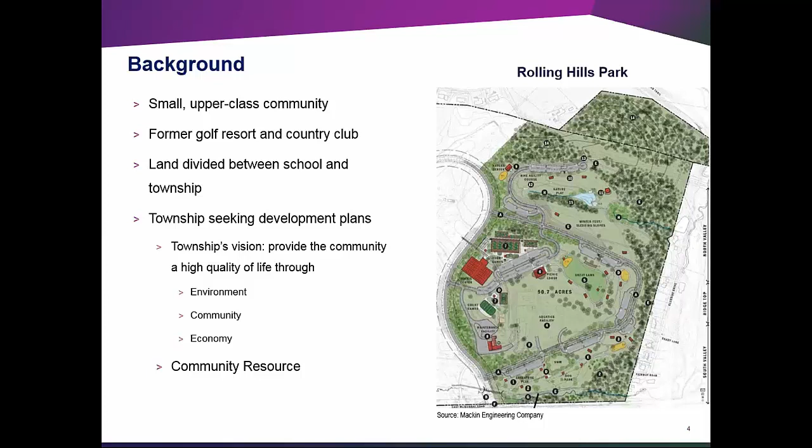A plan has been drafted, but an official park design has yet to be adopted. The township hopes to improve the community's quality of life through the 3 pillars of sustainability, and parks and recreation play a critical role in habitat and ecosystem preservation, engaging the community, connecting people, attracting businesses, and increasing neighboring land values. Our design and goals align with the township's goals for community improvement and engagement, but we achieve these goals through the emphasis of sustainable development.

Our project proposal will focus on the North Valley section of the park, only a portion of the overall park design. Using the illustration provided by the engineering firm working with the township, we have mapped our project design, and our main focus is a 6,000 square foot net zero nature center.

While the firm's plans include a nature center, there are currently no real published plans for a sustainable design. The nature center will feature a green roof and attached greenhouse in our proposal. Also included is a 500 kilowatt solar array, which will provide enough power for the nature center as well as park features included in the township's current working design.

The nature center will also employ a geothermal heating and cooling system, and a biodigester is also proposed to heat the greenhouse, produce fertilizer, repurpose food waste, and act as an education tool. Last, we have included information about planting native meadows to enhance the park's triple bottom line.

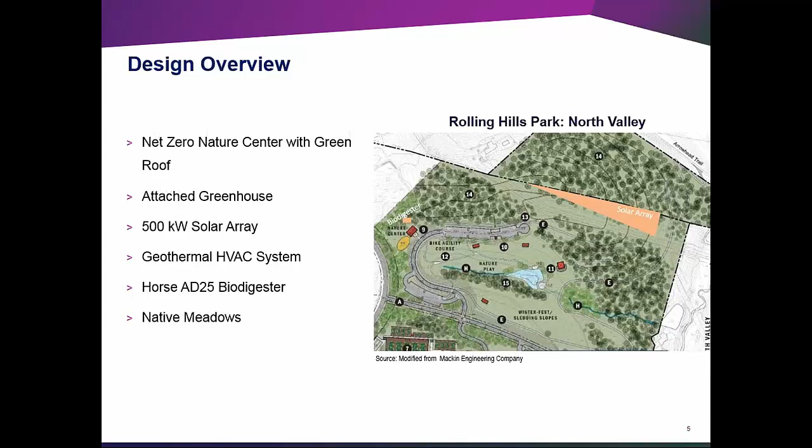We really want Peters Township to take credit from implementing accepted environmentally friendly technologies that would help mitigate air and water pollution in the region. Through the tactics we mentioned, the 3 primary tactics being renewable energy, energy efficiency, and education, is really where we want Peters Township to focus on to take the township to the next level.

The school district is important in our case just because it's on the neighboring piece of land. Unfortunately, the school itself was fast-tracked in terms of design and build, and there were very few sustainability features implemented. So there's a chance now to really engage the school primarily on having input on what the curriculum could be at the Nature Center for the educational side. Plus, as Kevin will mention later, a virtual net metering scenario is also possible with the high school.

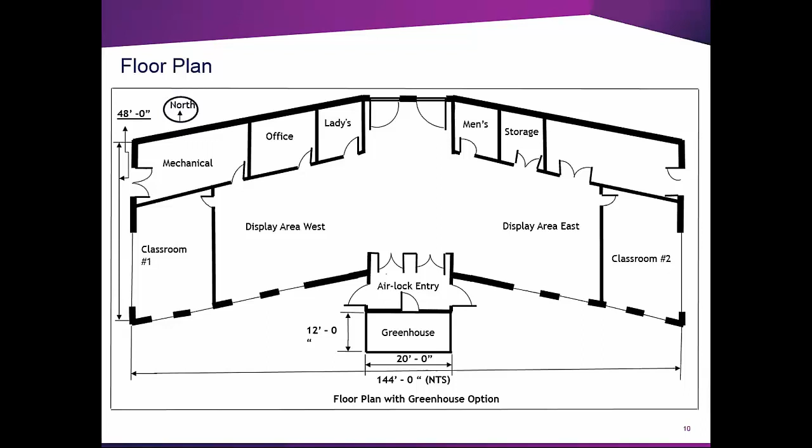The building features, if we go to the next slide, a central tower that will provide an opportunity to produce a chimney effect to cool the building during the summertime with natural convective currents that will rise and flow out through the central portion of the roof structure. And we designed the building with an ample roof overhang that will provide summer shading and lower the heat demand when it comes to cooling requirements.

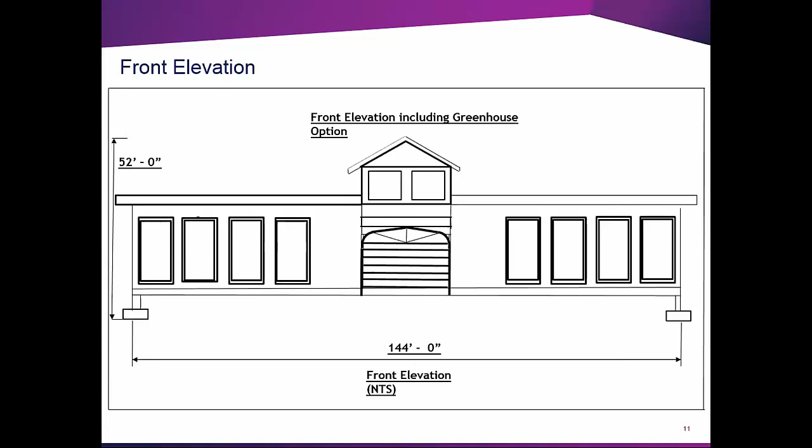The glazing itself that we specified would be low emissivity glass with a half inch airspace, double pane, and argon filled, so they would be pretty stout thermal performers when it comes to efficiency. And the roof design, as was mentioned earlier, we plan to put a green roof on the flat surfaces on either side of the central tower. We'll go to the next slide and talk about the green roof features.

Our plan includes a lightweight, extensive green roof. The green roof will total approximately 7,000 square feet and consist of a series of layers, each serving a specific purpose for the roof's lifespan and efficiency. The roof design will cater to the site's features, taking into account the structure's exposure, weather conditions, leaf cover, roof slope, and available substrate.

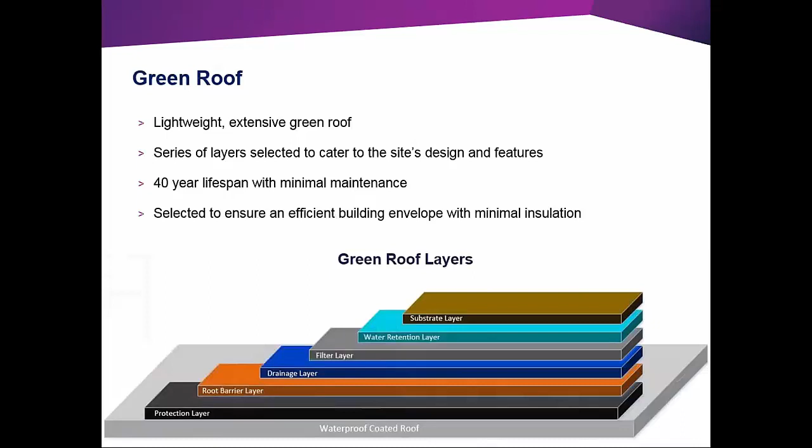The roof's life cycle is more than twice that of a conventional black roof and requires less maintenance. A green roof was important to this project for education and the efficiency it provides the building envelope. A green roof's thermal resistance and passive cooling effect will lower the stress on the HVAC system. Studies actually showed that structures with no to moderate insulation see better energy reduction results when fitted with a green roof. It is for this reason that only a moderate amount of insulation was necessary in the structural design.

So why choose a green roof? Green roofs provide a multitude of benefits. Most center on its contributions to the environment, energy conservation, and costs. This particular roof will serve as an educational tool for the community, giving it social value as well. Residents can learn more about the functionality and benefits of a green roof, with the hope that they will consider building their own or at least using the same principles of stormwater retention and providing natural habitat.

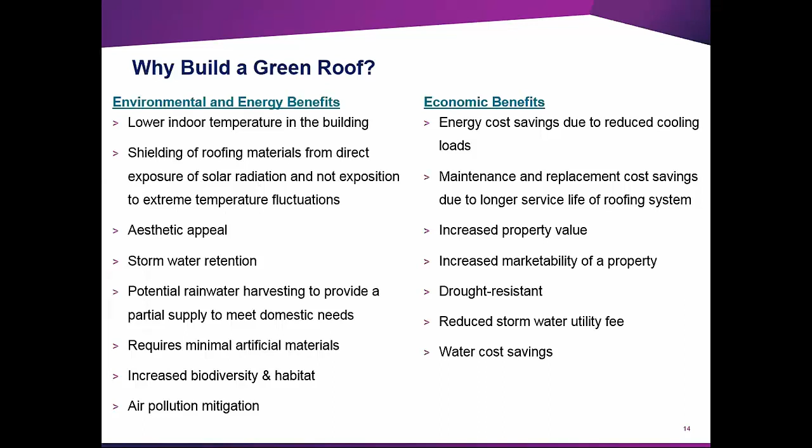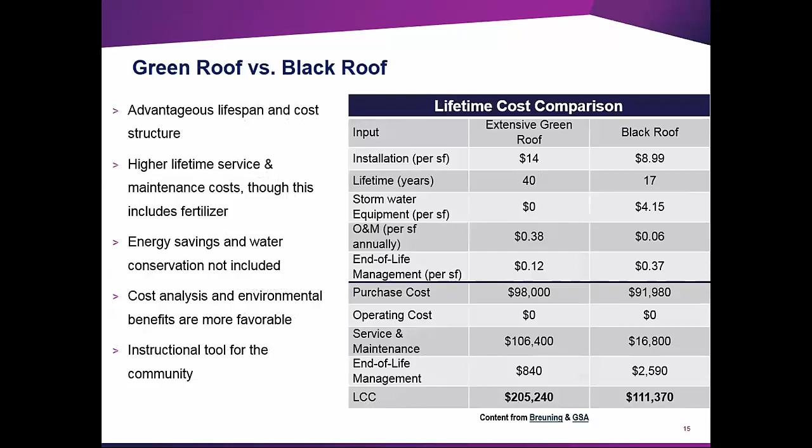Now we're going to move back to Wojtek for geothermal. Okay, guys, so we decided to go with a geothermal system, a water-to-water heat pump, and we are proposing a closed loop system.

A couple important things to mention here, the benefits. We are proposing a zoned space. So we have established 4 zones in this case, and that gives us the ability really to maintain the kind of comfort temperature that we want in each zone, and that's going to be really important for a building that's going to have maybe a lot less usage in the nighttime, potentially a lot more usage on the weekends.

A couple things I wanted to mention before I go into the benefits, just some of the assumptions here. The nature center doesn't have to be super cold in the summer. It's going to be well constructed, and with some of the things Ed mentioned, we're going to incorporate the overhangs, the passive features to really limit the amount of radiant load we have on sunny summer days. So those are just some of the initial assumptions I wanted to mention.

To continue with the benefits of the system, maintenance is a really big one here, because when you have 4 separate units that are maintaining the comfort in the building, individual units can be taken down without shutting the entire system down. Probably the biggest benefit that we saw early on in the initial design is, almost everywhere I looked, geothermal systems were promoted to show about 40 to 50% in energy reduction. That really caught my eye, and that's why we decided to go with this ultimately in a detailed design.

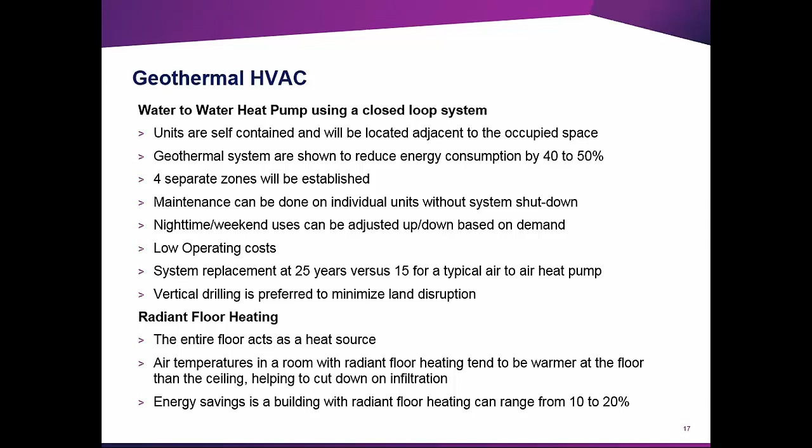We can maintain lower temperatures in the building, plus radiant floor heating really helps with cutting down on air infiltration, because a lot of the warmer air is staying towards the bottom, and the floor itself has the potential to save energy up to 20%. Okay, we can go on to the next slide. And I'm not going to spend too much time on the next slide.

So this is our proposed layout. We are proposing the 4 units. As I mentioned, we want to have four units, 4 zones. And this just simply shows you how the radiant floor plan is set up. You have the hot water going in to help heat the floor, and then you have the cold water return back to the units to go back out again to heat the floor. So we can keep going.

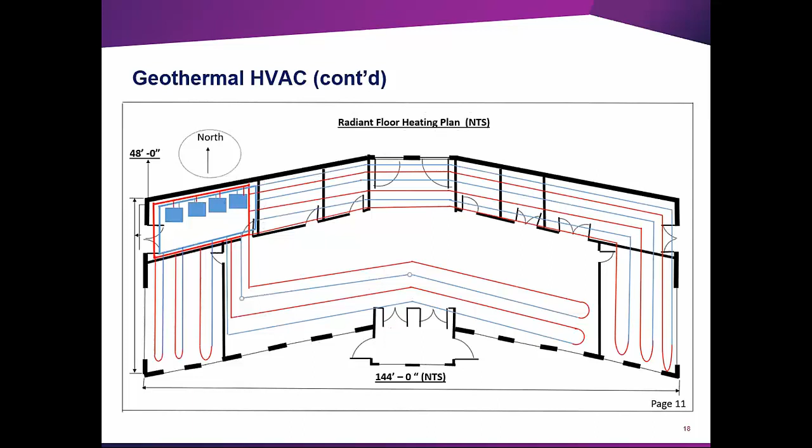For the cooling portion of the Nature Center, we are proposing a variable air volume system with an economizer package. The benefit of a variable air volume system is it's a decentralized system, and the main way it varies from other systems is it maintains a constant temperature, but it varies the air volume. And so the second point here, we can see there's quite a few advantages to this type of system.

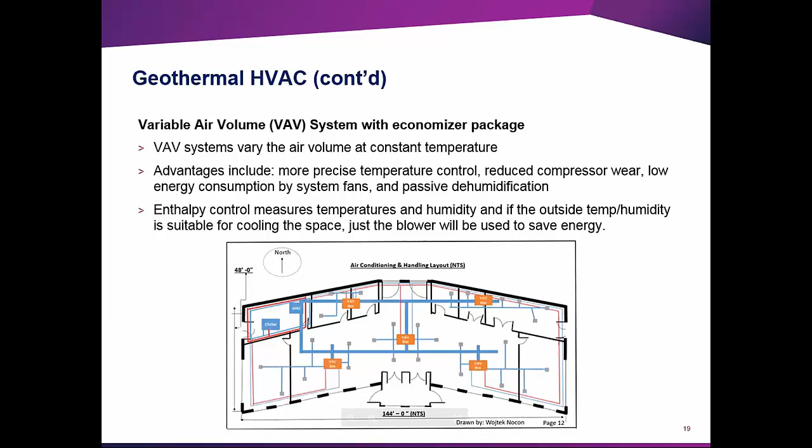More precise temperature control, which is what we're looking for definitely. Reduced compressor wear. System fans tend to be one of the biggest energy consumers of HVAC systems, so we have lower energy consumption by the system fans, and then we allow for passive dehumidification. The system also is really positive in the sense that we're going to have enthalpy control, and the system will measure the temperature and the humidity outside, and if it's suitable for cooling the space, the system will use just the blower, and that will help save energy. Okay, we can go on to the next slide, please.

Thanks, Wojtek. Moving on to the solar array. Anytime you want to achieve a zero carbon output, on-site renewable supply is always important. So we decided to go with a solar PV ground-mounted system with a total size of 500 kilowatts with a potential scale-up option. This will be located in the northeast side of the park along the gas line. And just please note that some trees will have to be removed in order to install the system. Next slide, please.

So the estimated output or the size of the system was really based off the annual park load estimate. Ed calculated the annual park load estimate based on the peak load of each facility. The annual load estimate came out to be roughly 560,000 kilowatt hours annually. And the annual estimated solar output of the 500 kilowatt system is roughly 613,000 kilowatt hours annually. So this would be enough to cover the entire park's load, and the majority of the output would come in the spring and summer months. Next slide, please.

Moving on to the financing and available tax credits. The township can enter into a tax equity financing option. This is where a third party can pay for the upfront capital costs, so the township wouldn't have to pay this steep upfront capital cost for the system.

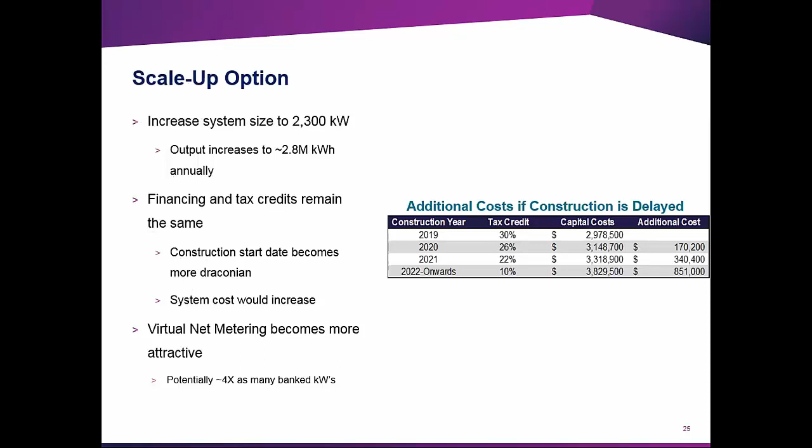However, the virtual net metering becomes more attractive as the township will be able to bank a lot more kilowatts, and the high school will be able to use the excess banked kilowatts throughout the year. So the virtual net metering is a lot more attractive under the scale-up option. Moving on to the next slide.

I wanted to point out, we also looked at a solar carport for an alternative design method. Same 500 kilowatt system. This we located in the adjacent parking lot next to the nature center. Some of the additional benefits that a carport structure has rather than a ground mounted system is it creates vehicle shading for community members and potential for a car charging station.

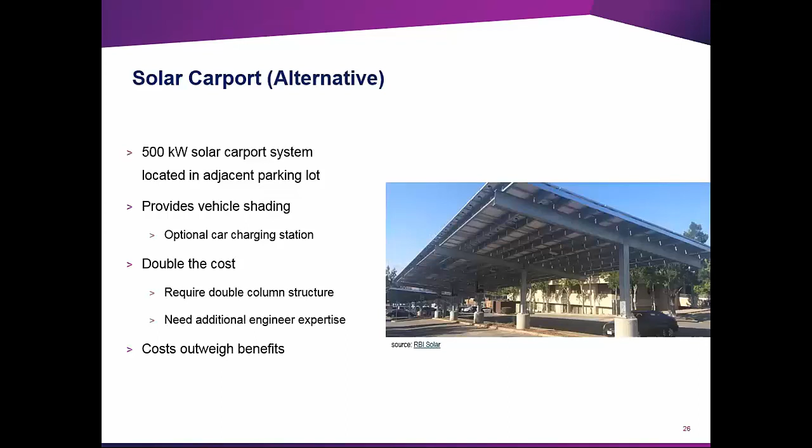However, getting into granular details, it was roughly double the cost of a ground mounted system. And simply the double cost really just outweighed the benefits of the shading. So we decided the ground mounted system was more viable. And now moving on to the biodigester and greenhouse.

Thanks, Kevin. I will be talking about the energy option we used in this project. Food waste is an important problem in the world. Estimates are as high as 50% and it poses a great danger for food security and GHG emissions in the future. We want to include a bioenergy technology option in our project to show how energy can be produced by using our food waste and educate park visitors.

We picked a small biodigester to generate electricity and heat. When we look at the feedstock potential around the park, the most feasible one seems to be Peters Township High School across the park. It has 1,400 students. Its cafeteria itself can produce 140 pounds of food waste every day. But summer break will cut the feedstock source.

At this point, food waste collection bins in the park can provide enough feedstock because parks are more active in summer. There will be picnic areas, pavilions, and food stalls in the park. All can add up to the needed food waste amounts. Next slide, please.

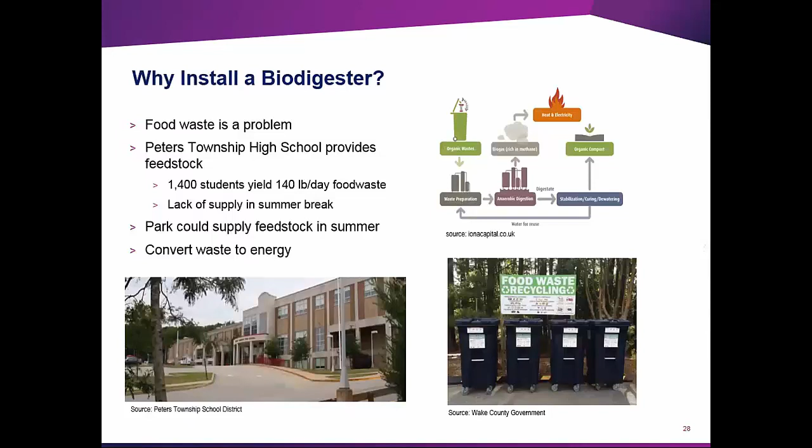After finding out available feedstock capacity, we decided to use a small biodigester and picked the basic HORSE AD25 model from Impact Bioenergy. It comes in a standard shipping container with a built-in electric generator, gas storage tank, and other control mechanisms. It is a compact and modular system.

It needs 135 pounds of food waste daily. This model doesn't have high energy outputs, 15,000 BTU per hour or around 3,000 kilowatt hours of electricity annually. We envisioned the horse as an educational system, so low energy output is not a concern. Also, it can divert 20 metric tons of CO2 equivalent GHG emissions from landfills each year. Next slide, please.

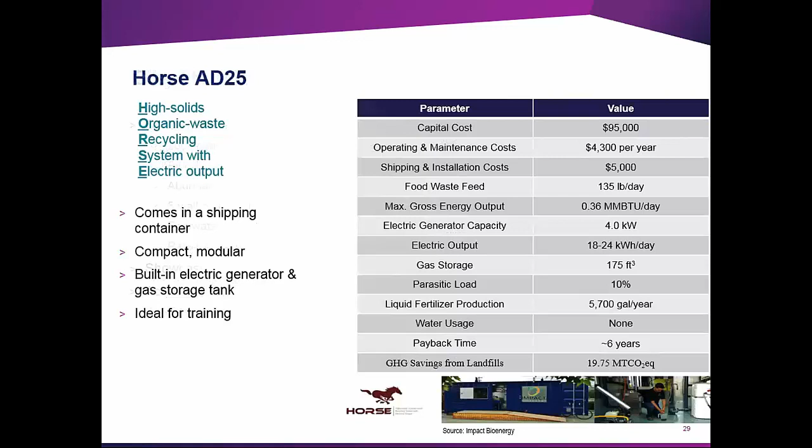We decided on a small heating application that would be in harmony with the nature center and agreed on a greenhouse. We placed the greenhouse in front of the nature center where it faced the south. It would get plenty of sunlight. Based on the horse's output, we found out that a 200 square foot greenhouse would be perfect for our project. We also assumed that a rainwater collection tank could be used with a passive irrigation system to minimize water demands.

It will be a complementary system to the biodigester in multiple ways. The greenhouse will use both biogas and fertilizer outputs and serve as another educational system for visitors and especially students. Next slide, please.

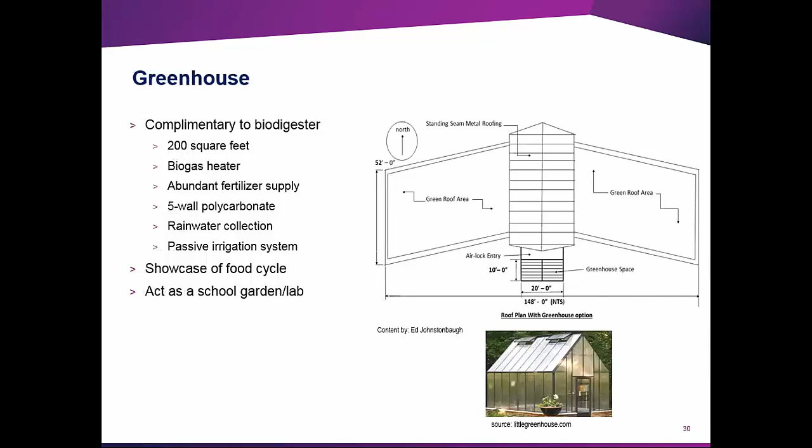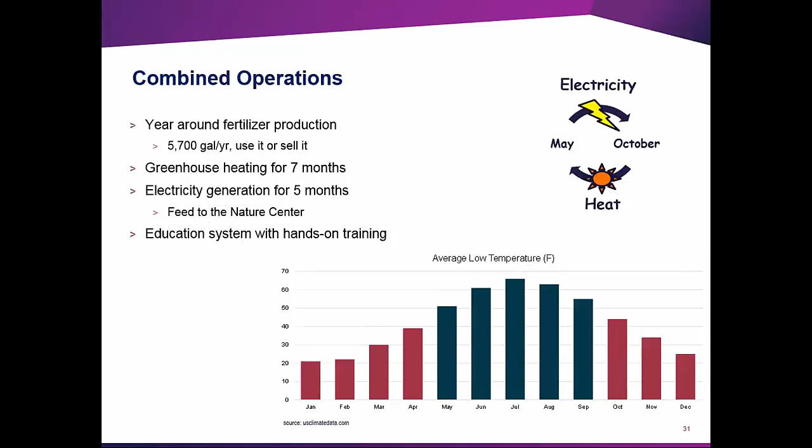With that, I will hand over the presentation to Alina. She will talk about native meadows. Thank you, Gonka. So we're actually looking to employ perennial native meadows. The native meadows are fields or small yards that are exclusively made up of Western Pennsylvania native plants. These fields can increase the aesthetic appeal around the park, and they actually make excellent transitions to wooded areas, but can really be planted anywhere in the park.

Native vegetation offers a stable habitat for native wildlife, providing local species and specifically pollinators a place to thrive. The meadows can be planted by the community, which will also build a stronger connection between residents and the park and nature. And the many benefits they offer touch on each of the 3 pillars of sustainability. So the land can be rehabilitated following the park's construction and prolonged use as a golf course, which likely used heavy amounts of pesticides and non-native grass.

The lawns are low maintenance, requiring mowing just once a year in its maintenance phase. And native plants are well acclimated to the area. So fertilizers, pesticides, herbicides, and water are all unnecessary, which saves the park from having a sprinkler system or a watering schedule for the native gardens. And if they plant just a 10,000 square foot meadow, it would actually conserve between 2.6 and 8.8 million gallons of water over 20 years. So compared to other lawn types, that's pretty significant.

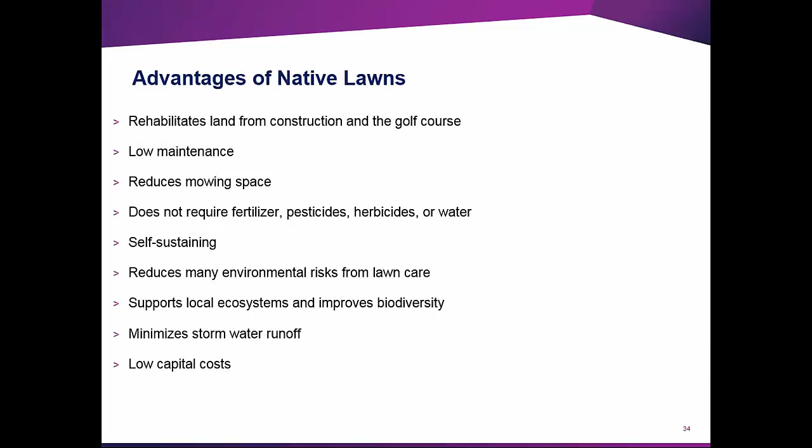So native meadows are self-sustaining, especially perennial meadows with no need for annual replants. Environmental risks such as carcinogens, radiation, ecotoxicity, minerals, and fossil fuel use are pretty minimal. Local ecosystems and biodiversity are strengthened with the provided natural habitat, and stormwater runoff is minimized. The deep roots of perennials actually play a really large role in water absorption. And costs are minimal, especially if the community is involved in the planting process. So now we're going to get into the economic analyses.

Okay, everyone, I'm back. So next we'll talk about the economic analysis that went into the HVAC system. The first thing we'll start with is, one of the things I learned, and I think we all learned, is scoping an HVAC system for a new building is definitely not an easy task. It's definitely easier, I think, for existing buildings, but in this case, we had to start off with the two most important things, and that's calculating the heat loss and the heat gain of the building.

Ed started with the architectural drawing, so that gave us a really good starting point. The length and the width of the building are mentioned in point number 2, 144 feet in length, 48 feet in width, and that gives us roughly a square footage of 6,912 square feet. And so that's the assumption that we went with for the total square footage of the building.

The heat loss calculation, as you can see in the graphic on this slide, requires 3 main inputs: the square feet of the individual wall areas, the glass walls, doors, and ceilings; a corresponding U value for each wall area; and an assumed delta T, which is the most extreme change in temperature we can expect in the heating or cooling months. We assumed 65 degrees to be maintained in the building, with a low temperature of 0.

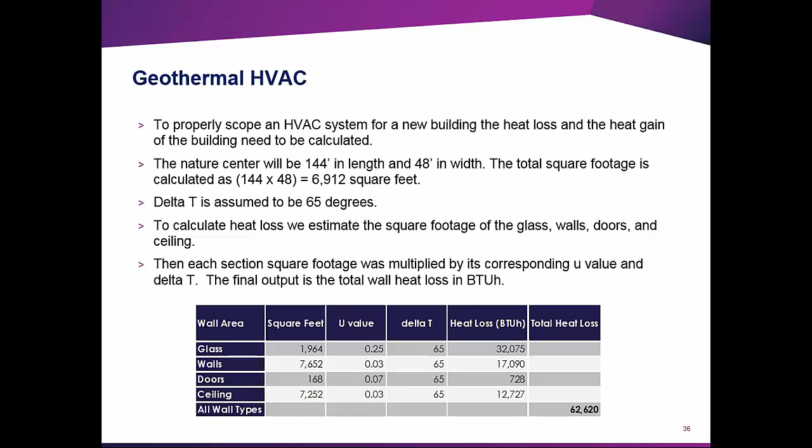Part of the heat loss calculation is also figuring out air infiltration. As you can see, we used a standard formula; Ed actually provided a lot of this information to us. The values show the total room volume, with delta T again assumed to be 65, and air changes per hour estimated at 0.5, along with a constant. The total air infiltration came to 95,940, and adding that to the wall heat loss gives us about 160,000 BTUH, which is what we estimated our total heat loss to be.

Now we will go on a little further in the economic analysis. I did want to point out some of the assumptions we made, listed in point number 4.

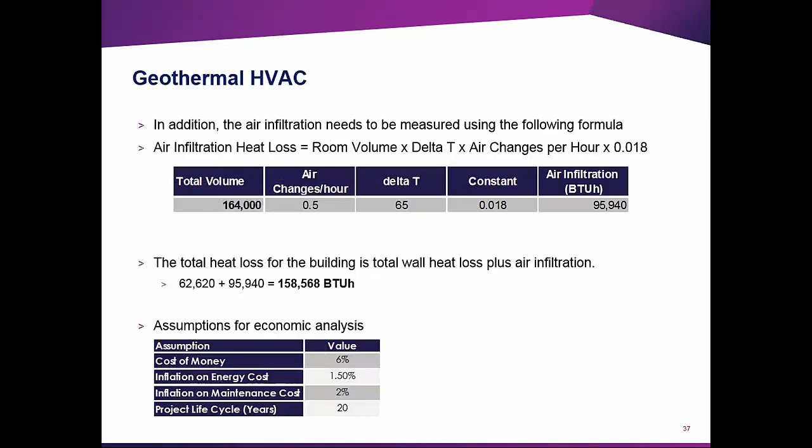When I get to the next 2 slides, I want to make you aware we did 2 scenarios for this analysis, and the only difference between them is the price of electricity. In scenario 1, we assumed 10 cents per kilowatt hour, and in scenario 2, we assumed 7 cents. That will slightly change some of the life cycle numbers. Just wanted to make you aware of that. Next slide please.

On this slide, we are getting into how we calculated the life cycle costs for this project. An important thing to note that's not listed is we used the BEST tool, a building efficiency system tool provided by the Hydronics Industry Alliance. This industry is really into the geothermal area, and they provided this pretty cool tool for us to use. The tool is not perfect, Dan looked at it and said for the purpose of the project it's good.

Primarily what I was looking to gather from this tool was how much electricity we were going to consume for our system. In order to properly calculate the life cycle cost savings of the proposed system, you have to compare it to another HVAC system. For this analysis, we chose system 2, the comparison system, as a standard electric air-to-air heat pump, which is a common installation. As you can see, our initial assumptions came true: the annual electricity consumption of the proposed geothermal system is less than half of the air-to-air heat pump. So right away, we are saving a lot on energy.

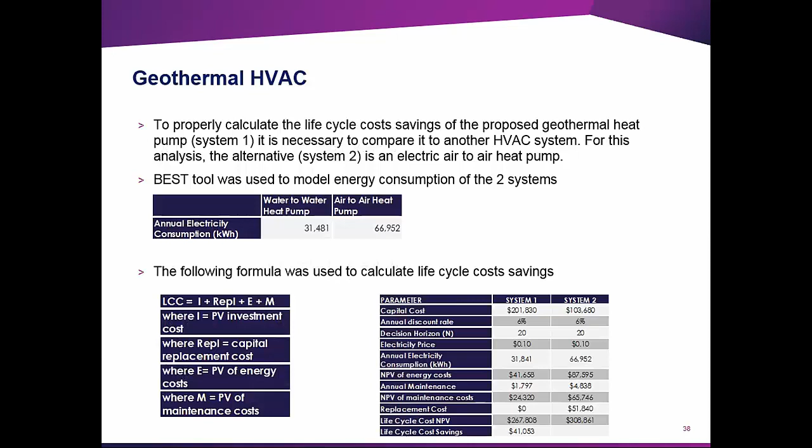Next slide. I won't spend too much time on the next slide because we have other people that still need to present, but this really shows a simple payback.

And to calculate the simple payback, we did it in both scenarios, and we were mainly looking at how much System 1 saves yearly in terms of energy and maintenance costs. It's a simple calculation, so there's no net present value here. In System 1, we'll just look at scenario 1. It saves $6,552 yearly over System 2.

So to overcome that initial high capital cost, which is $98,000 more than System 2, it'll take 15 years for our system to become viable. In scenario 2, it becomes viable at year 18.

And so what's really important here is that we want Peters Township to look at this system through a life cycle lens. We don't want them to just say, hey, this is too expensive up front, because in both scenarios we are life cycle cost effective, and this system will save Peters Township money. It will reduce energy costs, and they'll have a system that doesn't need replacement as often as others.

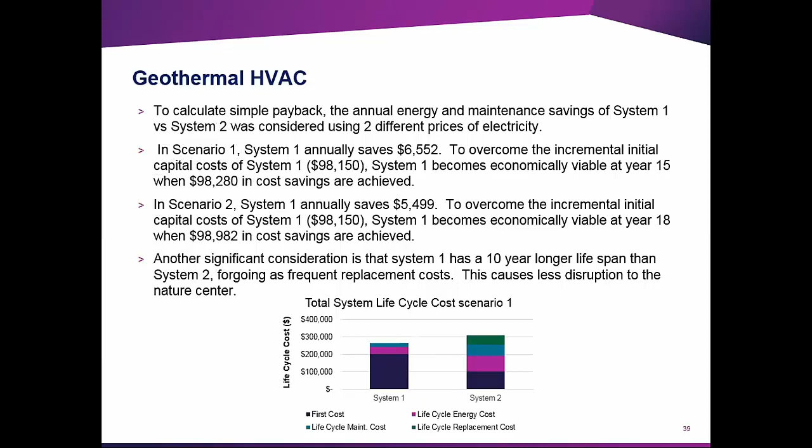Going with the economic solar analysis quickly, like I mentioned before, the ITC credit, 30%, could roughly save the township $300,000 if it's constructed by 2019 or starts construction by 2019. The reduced energy price under the PPA could save around $240,000 in energy savings throughout its lifetime.

And also there's solar renewable energy credits that can be sold. Currently in Pennsylvania, it's $10 per SREC.

We only look at economic feasibility of the biodigester. Greenhouse costs are relatively small, around $5,000, and we ignore them. Capital cost of the biodigester is around $100,000, and we assume that the feedstock will be free of charge, and fertilizer will be either used or sold to reduce expenses.

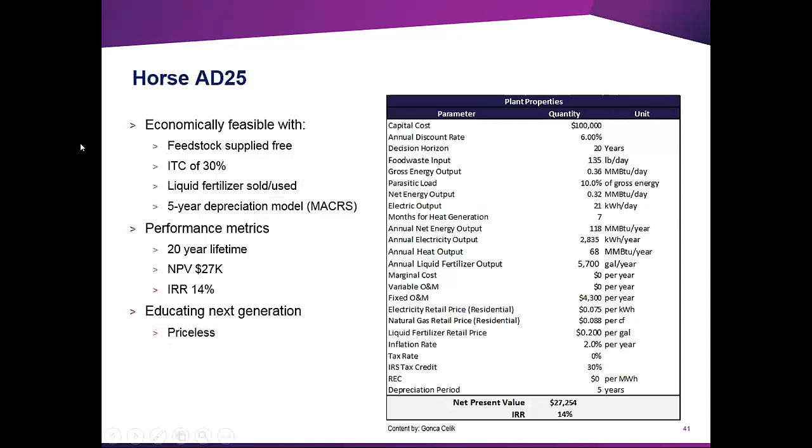Great, thank you, Gonca. So we looked at the environmental impact of the overall project. The Rolling Hills Park project is designed to be environmentally benign, self-sustaining, and offer minimal disturbance to the land and wildlife. Two key areas of interest were identified in the planning stages as a means to measure the project's impact on the environment, and those were air quality and biodiversity. These indicators serve as a measurement of success for the project for their lasting effects on the local ecosystem.

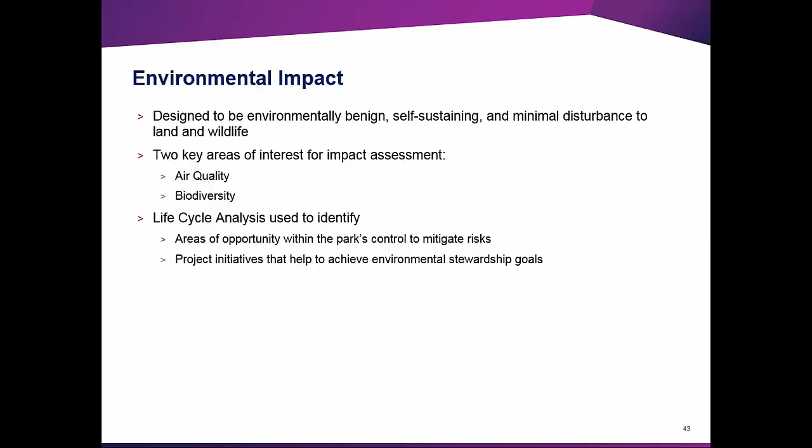So an LCA, or life cycle analysis, was performed to identify areas of opportunity where the park has control to mitigate risks, and also identify initiatives that are helping the project achieve its environmental stewardship goals. Highlighted in red are areas of opportunity, while the green represents positive outcomes of the project's air quality.

Construction will involve a high level of greenhouse gases, even if green construction practices and energy-saving processes are employed. The expected 283 metric tons of CO2 equivalent is higher than if we used wood or steel in lieu of concrete as our primary building material. However, alternative materials would not offer the same sort of strong building envelope for energy efficiency purposes.

Over the 20-year lifetime that we used for the project, 11,780 metric tons of CO2 equivalent from coal-powered electricity will be offset. The solar array will emit only 4% of the CO2 equivalent than, say, a coal-powered electricity option.

Food waste for the biodigester will be diverted from landfills. Meeting just the minimum feedstock requirement will actually mitigate around 395 metric tons of CO2 equivalent over 20 years.

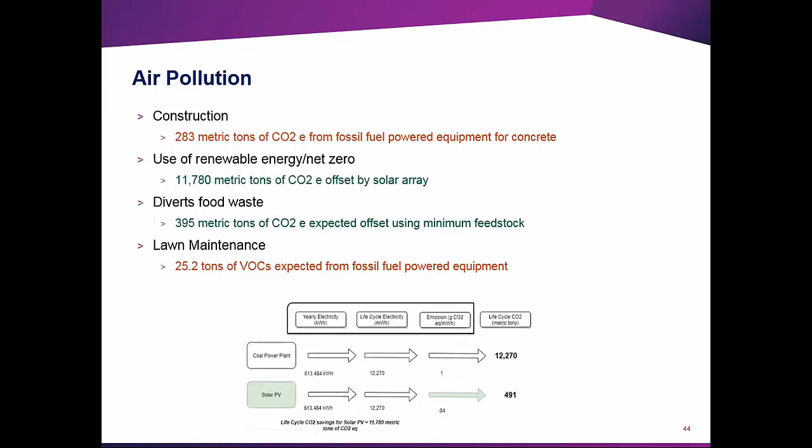And plans for lawn maintenance are currently unknown, yet the use of fossil fuel-based maintenance vehicles is assumed. So the life cycle analysis provided expected emissions for the use of these machines, and over a 20-year time span, this would produce roughly 25.2 tons of volatile organic compounds.

Biodiversity offers many benefits to the environmental health of an area and speaks to ethical, sustainable development. Similar to air pollution, construction will have the largest disturbance of the natural environment and has potential to harm the biodiversity in the area.

With the goal to increase biodiversity above current pre-construction levels, it is suggested that low impact development, or LID, be practiced. LID would harvest soil that would typically be lost during construction or eroded and store it for use in the native lawns. It is also suggested that loosening soil compacted by machinery or human presence be practiced as well.

Native lawns planted will grow stronger using this native topsoil and will provide a natural habitat for native wildlife, insects, and migrating birds. Multiple studies show a positive correlation between native plants and biodiversity, where wildlife abundance, diversity, species richness, biomass, and breeding pairs will all improve.

On average, native wildlife populations were 4 times higher in native lawns than their comparative non-native counterparts. Besides expanding the area's biodiversity among native species, exotic wildlife populations have also been shown to decline in native meadows, reducing the overall number of intrusive species in the area.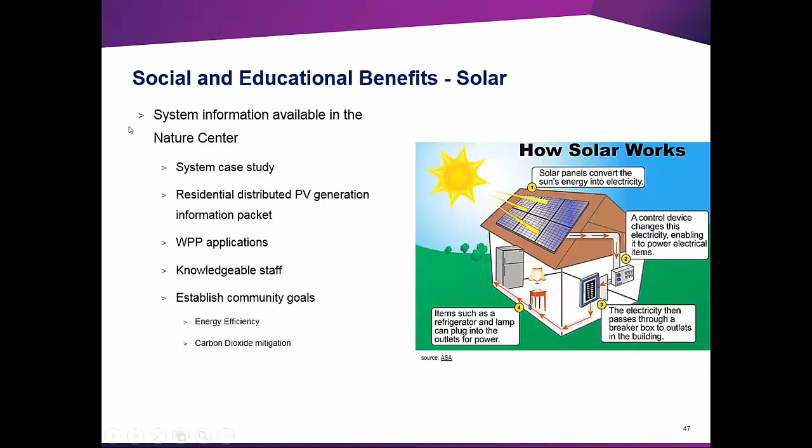Pick and Grill could be a fun day—visitors could pick veggies from the greenhouse and grill them on a fire-fueled biodigester. In short, performing demos of food waste management is a fun way of learning rather than reading textbooks.

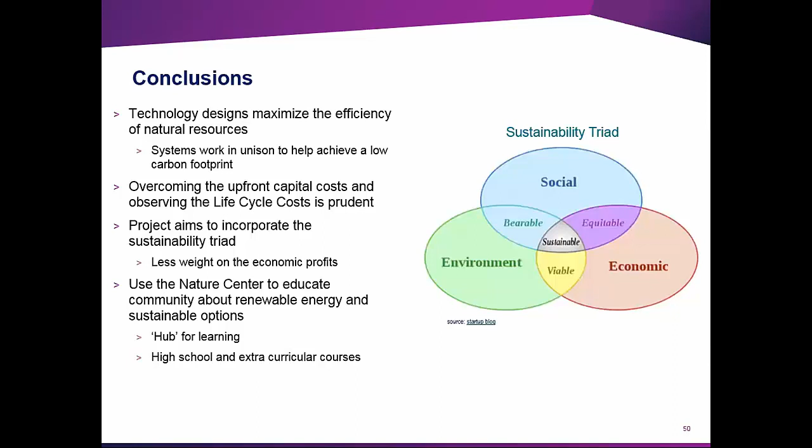Aside from the technology designs, using the Nature Center to educate the community about renewable energy and sustainable options is also very important. We consider the Nature Center as a hub for learning, where even high school classes and extracurricular courses can be held there. Moving on to the final slide.

Also, just the park in general—Rolling Hills Park is a platform for sustainability. There can be numerous clubs, activities, promoting local growth, local businesses, and the establishment of community goals under the realm of energy efficiency, implementing sustainable technology, etc.